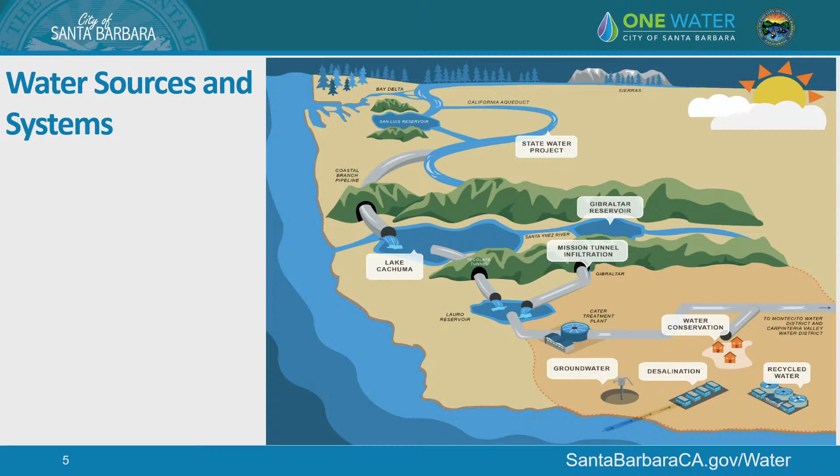This is a zoomed-out snapshot of our sources and systems that provide water to our region and community. It tells a story too: we have a very complex system, and our sources drive a lot of that complexity. Our treatment system is a T5 system, and our distribution system is a D5, the highest rating in terms of complexity. We also have a recycled water system, our desalination facility, the El Estero water treatment facility, and our groundwater production systems. Something we'll talk more about is the current state of our assets—our system is aged, especially our distribution system. It's complex and typically considered high pressure, so we'll get more into that.

Starting off with water treatment: they're responsible for treating our surface supplies for the entire South Coast region, more or less, and support water supply management, constantly working with COMB and the JPA members to support their capital improvement projects as well as supplies to their facilities. It's an ongoing balance of trying to keep everything going for our region. We also supply water to La Cumbre Mutual, and we work with Goleta Water District as needed to provide water to them during capital improvement projects.

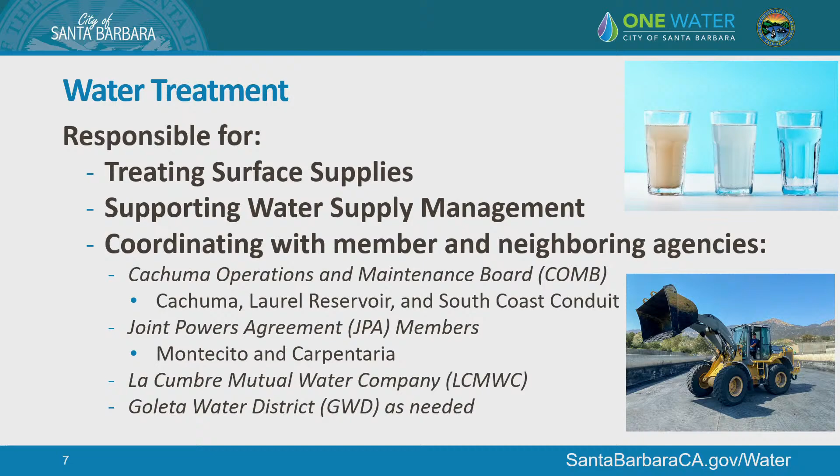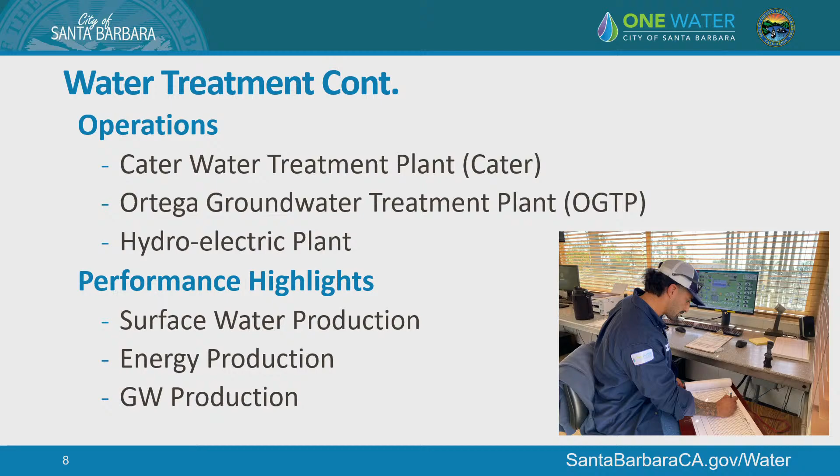Our city operations group oversees the Cater Water Treatment Plant as well as the Ortega Groundwater Treatment Plant and our hydroelectric plant. Some performance highlights we'll talk about are our surface water production, energy production, and groundwater production.

Our surface water production for this year was below 15,000 acre feet. You can see in this graph here on the right that conservation continues to be a strong theme for our community. We have a pretty consistent supply trend for our JPA members as well as our consumption for our city residents.

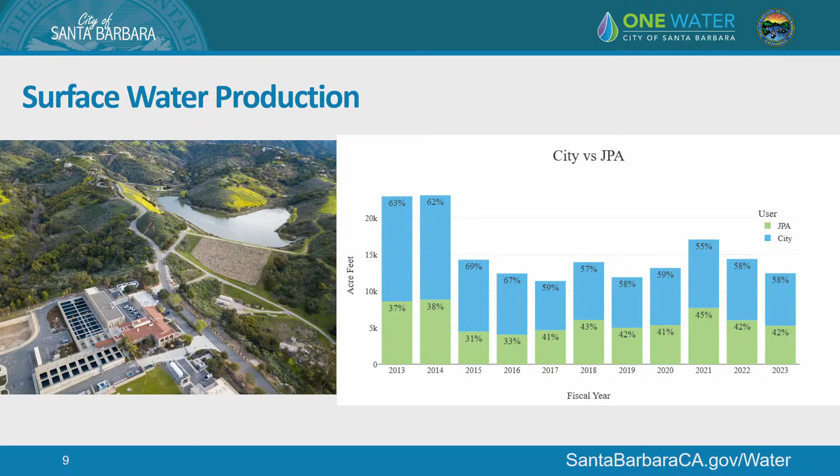Energy production is a big part of offsetting Cater's energy demands. On the lower left, that's the Pelton wheel that receives Gibraltar water and turns it into power. This graph shows a year with some usual trends, with the exception that we received water in Cachuma that we used going into February and March, which changed up our usual strategy to maximize the benefit of that supply.

As you can see in October, November, December, the water quality at Gibraltar did decline to the point where we were not producing energy from this facility.

A key point here is that we are doing an energy master plan, and we're going to be looking at maximizing the benefit of the hydro facility at Cater. I'll get into a special project that will present an opportunity for us to consider in the future.

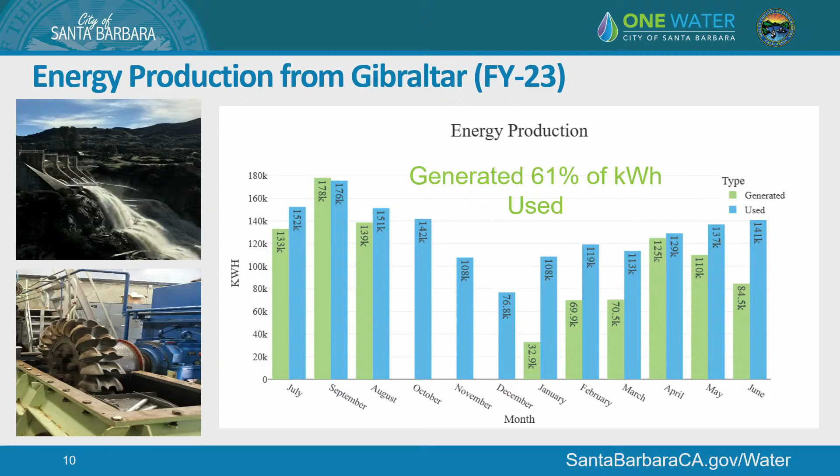In February, we shut down Ortega Groundwater Treatment Plant in order to rest the basin and take advantage of that opportunity to do some maintenance, which you see on the right. One of our vertical turbine pumps is being taken offline so we could do some much needed maintenance.

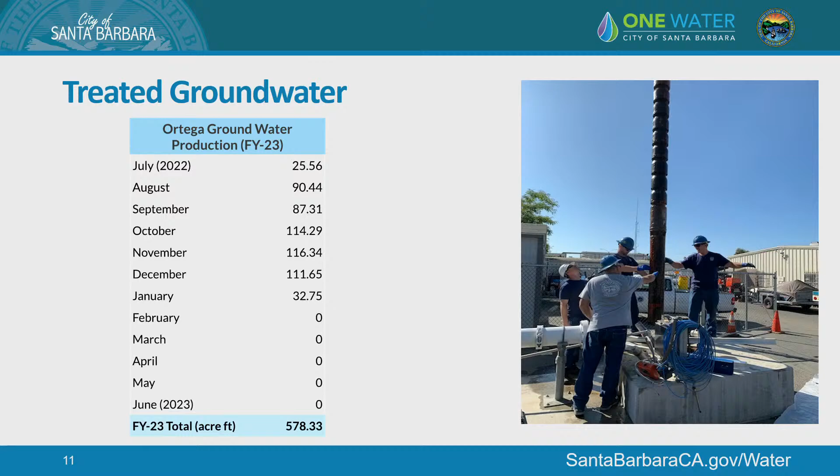As mentioned with our energy master plan, we're working on special projects to maximize the benefit of Cater. On the right is the Tesla battery system we installed this year, actually completed this year. It was a multi-year project that took a lot of hard work from our operations staff.

We were able to take advantage of the fact that we were going to have to shut down power to the plant, so Edison went ahead and replaced the transformers that serve Cater.

This battery pack allows us to offset peak demand, so between that 4 p.m. to 9 p.m. window, we're able to transfer power to the grid, and it's going to lower our electric costs about $870,000 over the course of 10 years.

It also provides an additional backup supply of energy to the plant. It can power the plant for about 4 hours. We do continue to have a diesel backup generator, which is really important for making sure this asset can always operate.

That said, the project was funded through the state PUC. We will be looking at opportunities to increase capacity at the plant, maximize the footprint we have there, and we're happy to have this project delivered.

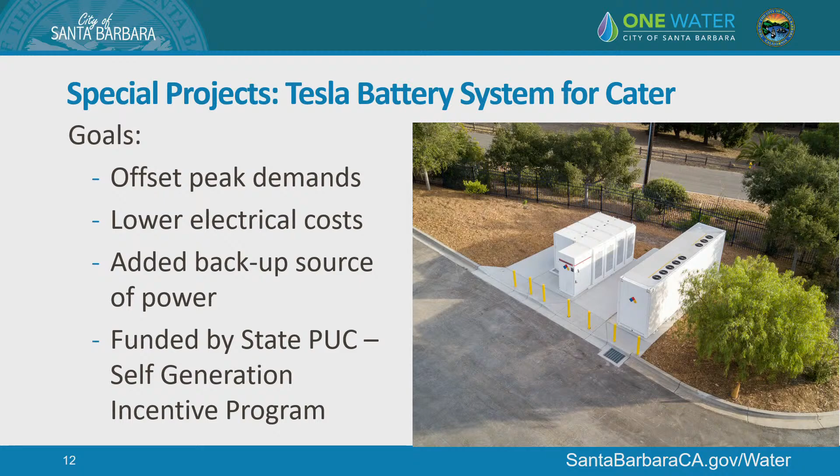Moving on to water distribution.

Water distribution is one of the largest groups in Public Works. They oversee a wide range of assets: over 300 miles of pipes, 27,000 service connections, 13 reservoirs, 14 pump stations, and 17 pressure zones. The 17 pressure zones is a unique challenge because we have a lot of terrain and varied elevations, which creates a lot of pressure management challenges.

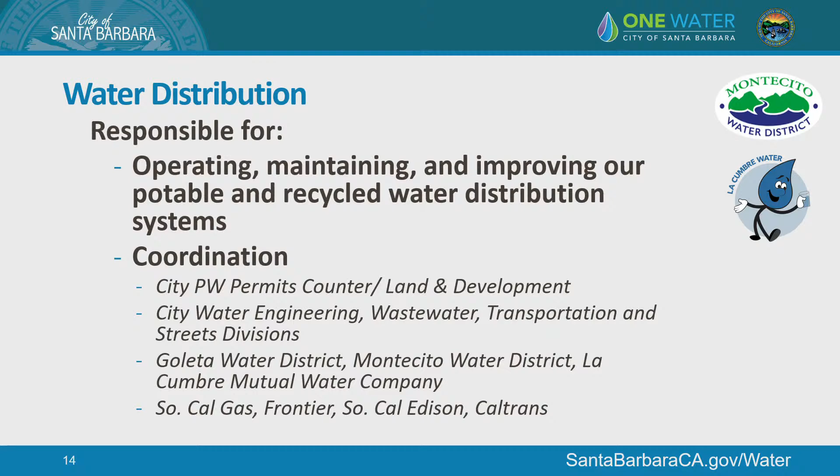They're responsible for operating and maintaining the system, and they also oversee our recycled water distribution system. They coordinate with a variety of utilities and other sections, divisions, and departments within the city.

Some of what we're going to go over is just their programs. We've broken up their programs into 3 general asset groups: pipelines, pump stations, and reservoirs, and then we have a group that oversees asset management, planning, and coordination. We're going to touch on some performance highlights.

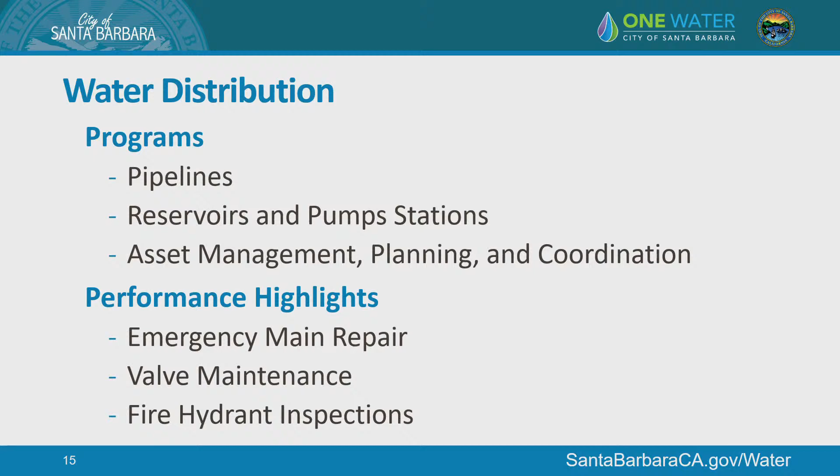The pipeline program is maintenance intense and capital intense. We'll be touching more on that, including emergency main break response, supporting capital, and our flushing program, which is currently not in full deployment since we're having to scale that back a bit due to current staffing. We're also touching on valve maintenance and showing you where we're at with that program, meters, fire hydrant maintenance, and installing new service connections, which is seeing a record level of permits as the city looks to add more density to our downtown region.

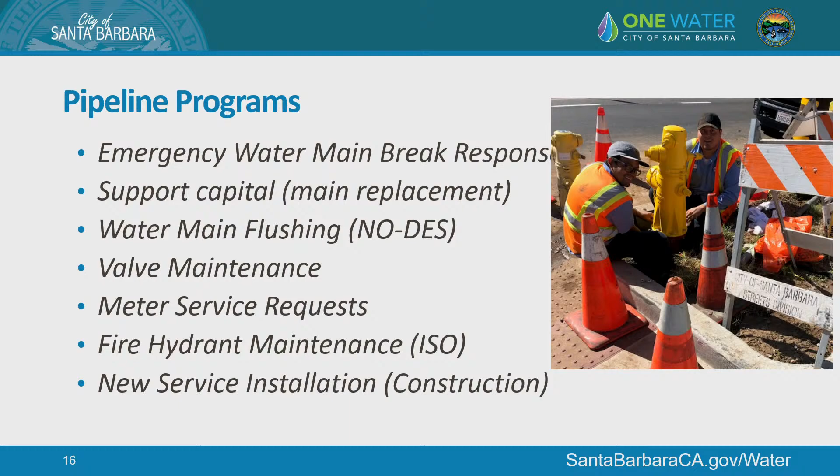A lot of the system was designed to maximize storage, and over time we've learned that water quality degrades. So we've done a thorough study of our reservoirs and how we need to go about replacing them, and we're going to get more into that.

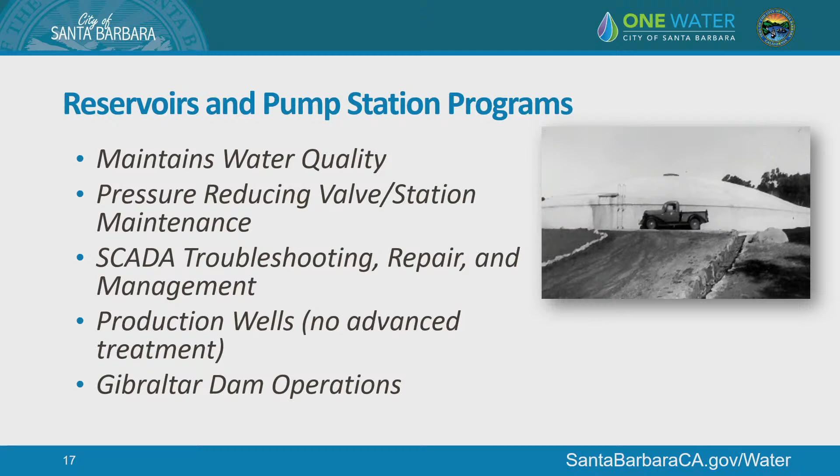And then, like I mentioned, pressure reducing stations, that's a part of our pressure management program. And then, of course, SCADA to keep eyes on how our system's performing at all times. This particular section also assists with special projects up at Gibraltar Dam.

Asset management program, you've heard a lot about asset management within Water Resources. It's been a big goal. It really started with El Estero and some initiatives there, and has since moved to distribution and treatment as well.

What we have on the right here is an example of some of the asset management work that we're doing. You can see the instrument in the gentleman's hand that's used to collect high precision GPS, which is a program that we piloted. In fact, others have come to us to study how we've used it. East Bay MUD came and visited us, an agency of that size and scope. I was a little shocked, but they were really impressed with what we put together.

We're looking at how we can maximize the benefit of this data throughout our capital improvement process. As you can imagine, having that precise location information in your GIS gives you a lot of power, so people are not having to search plus or minus 3 feet in order to locate the assets. It's something we've been working on for a few years and is really starting to come to fruition.

A few other things to mention is just the utility coordination aspect. There's just so much capital going on in the city, as I'm sure you've noticed driving through the city streets. We're seeing a record number of utility permits, the other utilities, SoCalGas, Edison. They're all needing to go through the same process as us of replacing their assets.

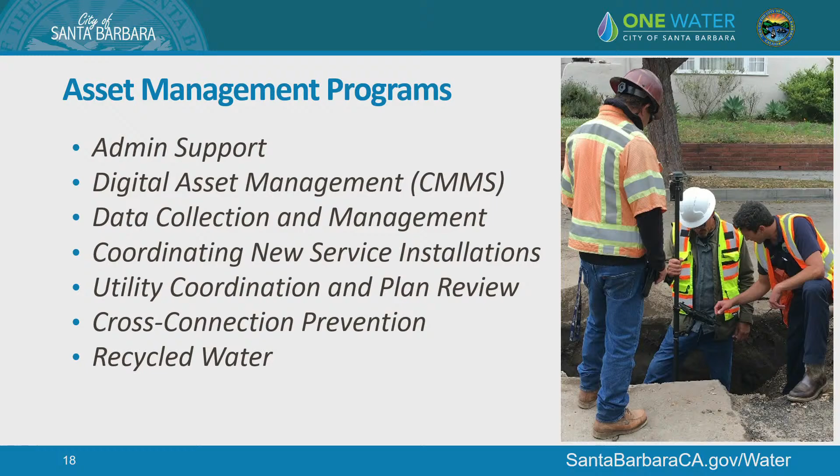Some performance highlights: emergency repairs, emergency response in general is something water distribution is a big part of for the city. We not only respond to our emergencies, but we respond to calls from PD and fire, as well as parks. Really anything that comes in after hours that's not public safety comes to us, and we provide a staff member after hours to support the needs of our community.

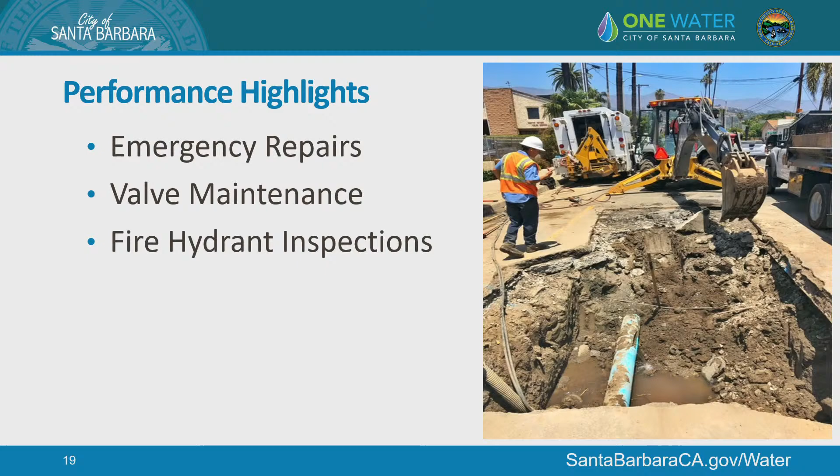You can see on the right here, we've got a crew working on a water main break. That's something we'll talk more about. Again, valve maintenance, hydrant inspections.

This is something we're proud of. It's really a significant challenge to be able to restore water within 12 hours. That might seem a little shocking because, yeah, we are staffed and we are really good at our job. But there are a lot of other utilities out there, and we rely on them to mark their utilities after we do have a break. Those lead times can make this a bit of a challenge. But as you can see, almost 95% of the time, we're meeting this goal, and it's an important goal for the community.

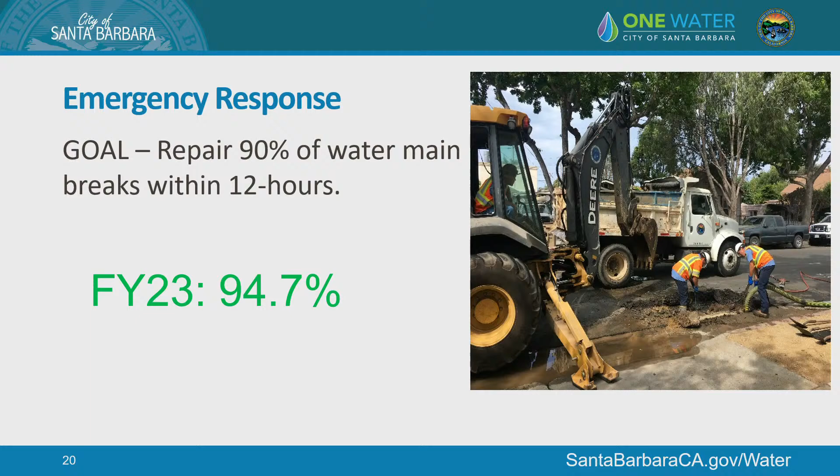Doug, you start? Yeah, it was interesting, Matt and I took some time to meet one-on-one with all the staff and just talk about how work was going, what were their frustrations, and one of the things that did come up was this needing—I'm using this opportunity just to inform—when we have to dig in the road, you have to call USA, Underground Service Alert. All utilities are notified, and they have a certain time to respond and come out and mark their utilities.

And in those times, we can't do anything. That can be very frustrating for our customers. They're sitting there watching city staff sitting there. And I just tell you, from the city staff perspective, we hate sitting there and not being able to do anything. But for the safety of our people and our community, we just can't go into the ground until all the utilities have been marked.

And so it is a frustration, and I think as we are starting now to get more high precision data, potentially sharing it, but there are obviously security reasons for not sharing some of this information. It is one of the challenges we have, because our folks will mobilize, get there, get prepped, get our parts, and then we just sit and wait for the gas company or electric company to show up. I just want to put that out there because it is a frustration of our staff, just having to explain to the public why they can't do anything.

With that, I will add that we stay very busy. I do have a clip here of a water main break that was significant. It's really what we're trying to avoid with our asset management work. I don't have the audio on it, so I'm just going to share a little bit of information about the incident. This incident occurred just at McKinley School, over near the community college, the elementary school there, and as you can see by the amount of debris, it was a significant water main break. It required a robust response from the entire Public Works Department, but especially with water distribution taking lead.

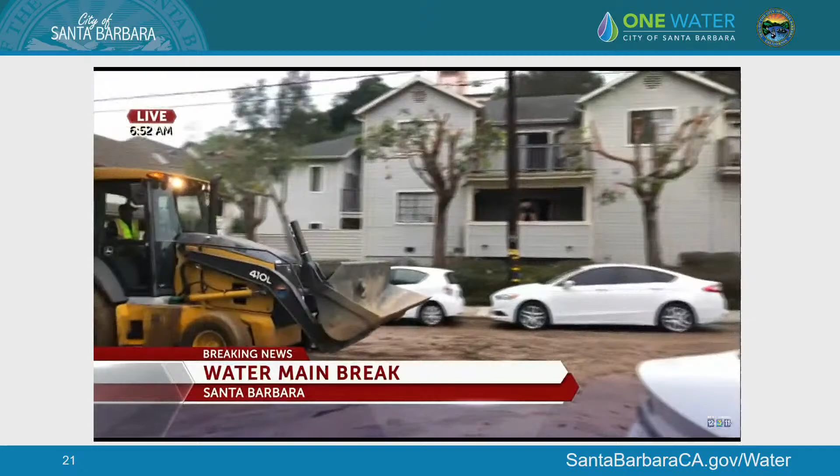In this case, it was unfortunate. We were really not aware of the risk that we had with that particular pipe. It was a 12-inch diameter cast iron pipe from the mid-50s, and it destroyed a significant section of the playground. We did work swiftly, and we had the full playground restored within a week. That was huge, and we had to coordinate a lot with the school on that.

But then, as you could see by the amount of mud that was down below, there was a lot of cleanup. We had to work with Woodside HOA, and I want to give credit to Marissa Kahn and our risk management group. She does an exceptional job of managing claims for the city. The unfortunate total on the cost was about $1 million worth of cleanup and repair. So significant costs—it's what we're really trying to avoid with our asset management program.

I'll talk a little bit more about that. What you see here is our costs that we've gathered from our CMMS, our computerized maintenance management system. These costs are really a reflection of how well we manage our emergency response, but they don't include a lot of other things. On average, we experience about $100,000 in claims annually.

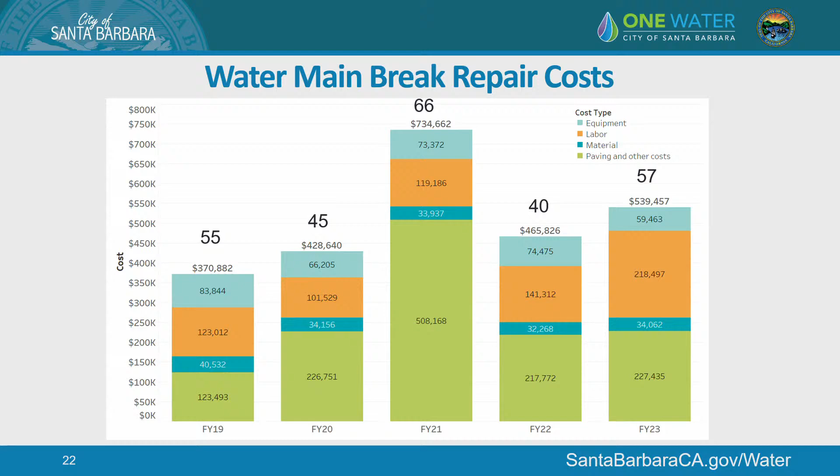There's also the cost that's not captured: the reactive response, pulling people off one thing to do another. And then there's the cost to the community, which can be substantial, probably equal, as some studies have indicated, from having to reroute traffic, close businesses, close schools, things like that. So it's a substantial cost, and it really is just lost time, resources, and money.

So moving on to our water main replacement goal, this is the why. Why are we replacing water mains at the rate we are? It's a significant investment that we're pouring into our capital program. It's the biggest asset group that we have, and this work in main replacement is really critical. I think the next slide shows this quite a bit.

Again, we're trying to replace 2% of our water mains annually. In fact, we're not trying, we're doing it. It's a huge goal. If we're talking to many other utilities out there, they are in the 1%, 1.2% range, which is where we used to be. But you'll see in this next slide the why, again, why we're doing this.

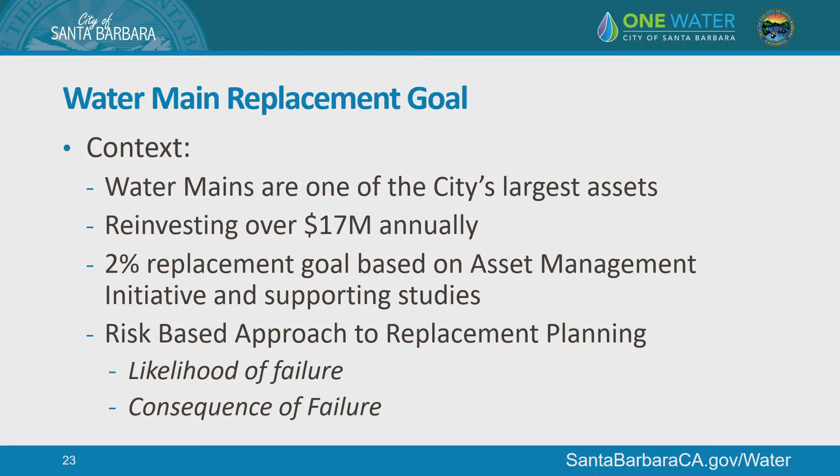We do use a risk-based approach to replacement planning—likelihood of failure and consequence of failure is what we're trying to gauge. We are working with Colorado State University; we've been partnered with them for some time, and we've developed a replacement model that takes into account all the characteristics of our pipelines, so that at a desktop level we can analyze where our challenges are and how we can put together different pipes into a single project, because a lot goes into optimizing our replacement planning.

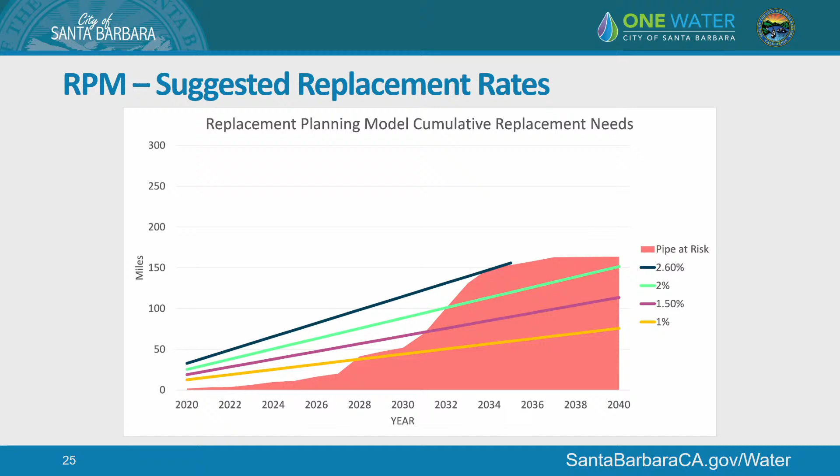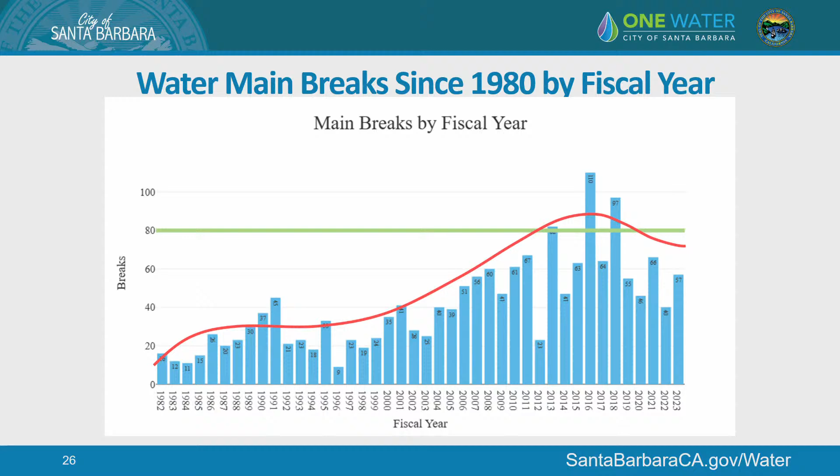I'll touch real briefly on this one. Commissioner Snyder, thank you, I had a quick question about this.

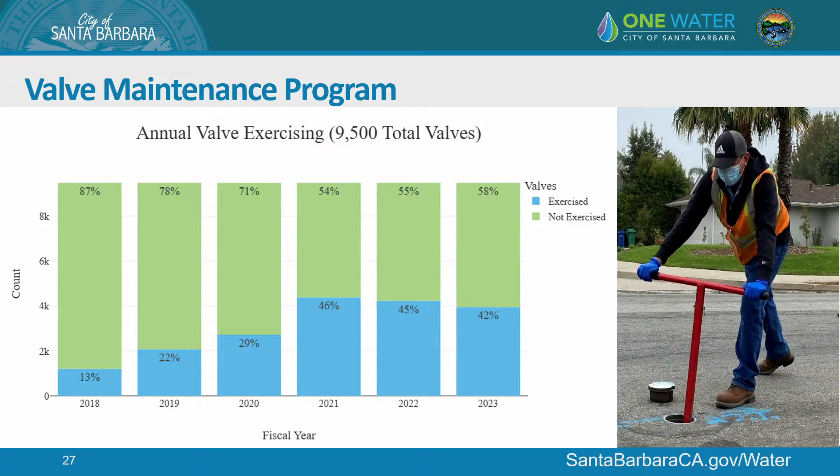Just generally thinking about the water main replacement and valve exercising, are there opportunities around new technologies that would help automate some of this or advance the system, or is it pretty standard, just needs replacing, and the technology isn't advancing that much? Great question, thanks for bringing that up, because the person on the right is showing you how it's done. We also have a valve hydraulic piece of equipment that takes the labor out of it. This is the fastest way to do it, but probably 80% of the time we're using that valve actuator. It does gather information, but there's nothing feasible you could automate in the process, unfortunately. We're always looking at innovation. We're a member of an innovation working group, ISLE, and we're always scanning for opportunities to use technology to reduce the labor we put into the work, but unfortunately it's just not feasible. Thank you.

Maintaining our fire hydrants is obviously a significant and important goal, and we do maintain our fire hydrants. We inspect them on a 3-year basis and exercise the valves associated with them, ensuring that the control valve is working. This feeds into the Insurance Services Office rating we receive, so it impacts insurance rates. We work closely with the fire department to make sure we're achieving strong ISO scores, keeping insurance costs low for our community, and we tend to score very well.

Moving on to Gibraltar Dam. You can see a picture of our operations and maintenance crew, or at least one of them. We only have two FTEs assigned to Gibraltar Dam, and that is Mr. Frank Deely, our dam caretaker.

He's up top on La Cumbre Peak for one of the snow events that I'm sure you all recall. Frank lives in the backcountry and at the dam, and it's a unique challenge to live that remote. He does the job excellent, exceeds monitoring requirements, and takes a lot of pride in it. His assistant, Mr. Castillo, also gives him a lot of help.

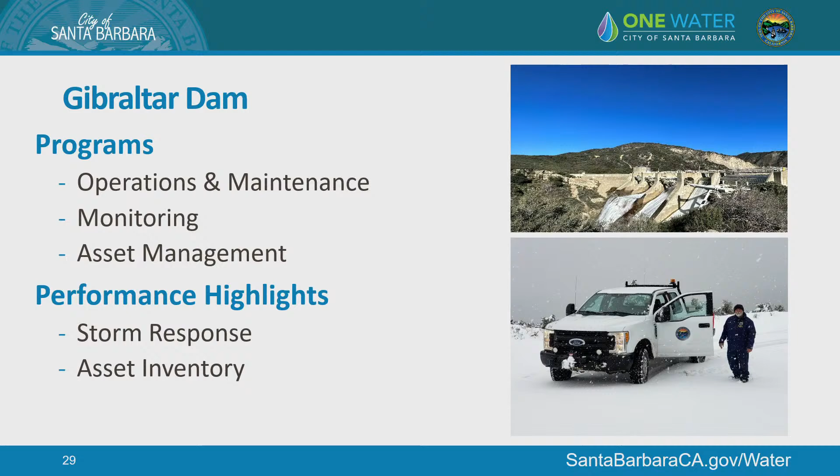The asset management that we've been doing in distribution and treatment, we're also going to be doing for Gibraltar. We'll talk a little bit more about that. Some performance highlights we have is the storm response. The January 9th storm was significant, and we'll touch more on that. Then we're going to do a deeper dive into the asset inventory later in the capital part of our presentation. And above, that's a Bluebird Day at Gibraltar. It's just beautiful. An asset we've had for over 100 years, and we're fortunate to have it.

This is a snapshot of actually January 10th. So January 9th, as we've reported through our wastewater group and others, presented a lot of challenges. I recall on that specific day, as the storm was coming in and the latest flood models were hitting, they were predicting about 9 inches, and we saw nearly double that in the backcountry. Being minimally staffed and just the way the storm hit made for an all-hands-on-deck situation, figuring out where our damage is and what it looks like.

This is the lower road to Gibraltar. This is U.S. National Forest, and they maintain the road. As you can see on the left there, all those landslides, that's a lot of what we're having to deal with. On the upper road as well, we've got several miles of backcountry road that we have to maintain, and there were slides everywhere. From January 10th on, we were doing damage assessment and just trying to access the dam.

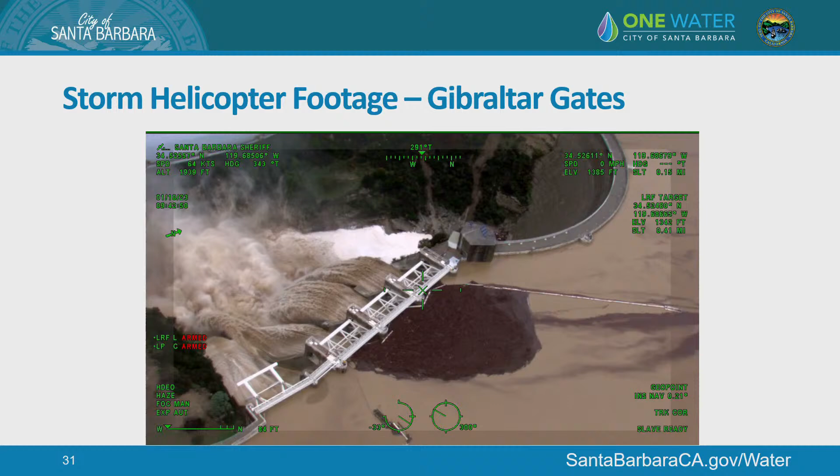We had mobilized dozers as well as loaders and other equipment just to be able to access the dam, which took a few days. We actually had to helicopter some of our staff in, our engineering team, as well as some contractors, to do some damage assessment, since we had log booms stuck in our floodgates. It was something we didn't immediately pick up on that night, but then the next morning we found out that the log booms had been compromised and pulled through the floodgates.

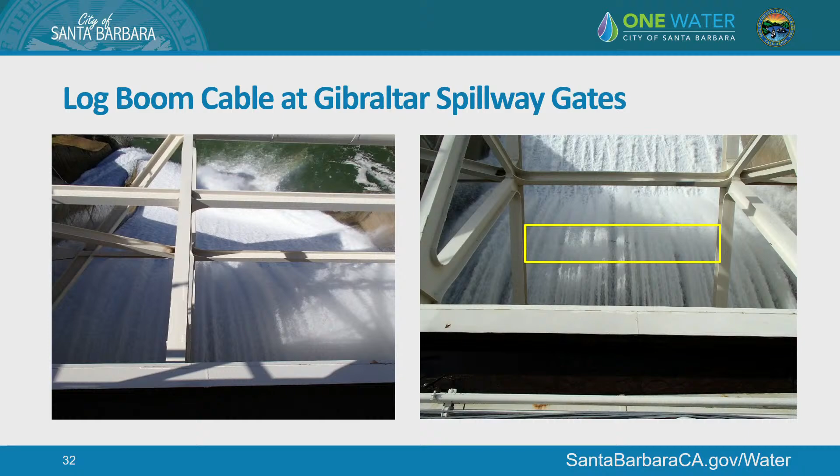What you can see on the left is kind of like normal flow. In the little box on the right, the yellow box, you'll notice there's just the tiniest indicator of some cables being pulled through there, which of course was quite alarming. The next day on January 11th, we mobilized our staff out there to come up with a method. We were fortunate, we have a great engineering team, and they were able to free the cables.

It was something that, in a nightmare scenario, we're going to drain the lake to that low level and lose our supply there. But they were quickly able to mobilize and come up with a method to actually cut the cable on both sides and then pull it from both downstream and upstream of the spill gates, and made quick work of it. So we were never in a situation where we actually had a significant threat.

I'm going to let Ms. Shu, Principal Engineer, go ahead and take over and give us an update on some of the capital improvement that's driving our work.

Good morning. I'm Ashley Shu, Principal Engineer, and I oversee our Water Resources Engineering team. We're responsible for supporting the entire Water Resources Division in delivering design and construction of capital projects, as well as supporting operations when needed, mobilizing during emergency situations.

I'm going to provide an overview and look a little bit more at some of the storm damage we experienced from January 9th. It's timely since we're right in the middle of our first major storm event for this rain year. I did want to reiterate what Mr. Ward has mentioned, that we're in a period of our strongest capital program for the water program. We currently have about 24 active capital projects totaling a value of over $200 million.

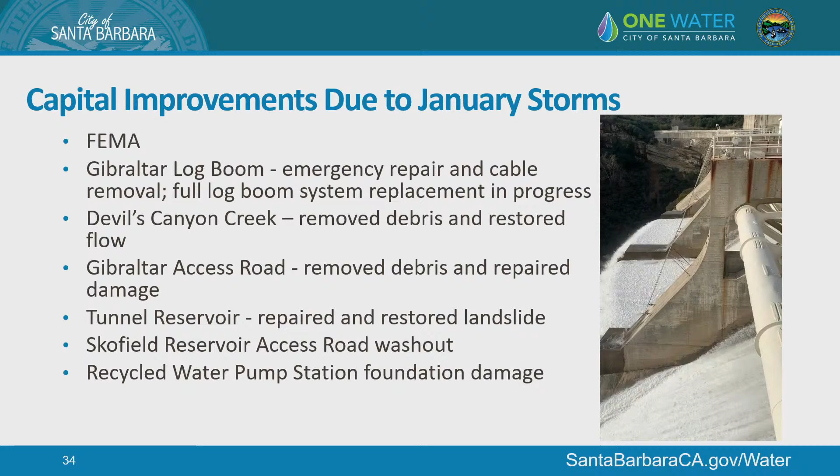Most of these repairs are already complete, most of them completed within the first month or so. We do have a few that are ongoing, but the other item that continues to be ongoing is our coordination with FEMA, and that is a significant effort - providing all of the required backup documentation in an effort to get reimbursement. That will continue for quite some time, even as we enter the next winter and potentially see additional damages.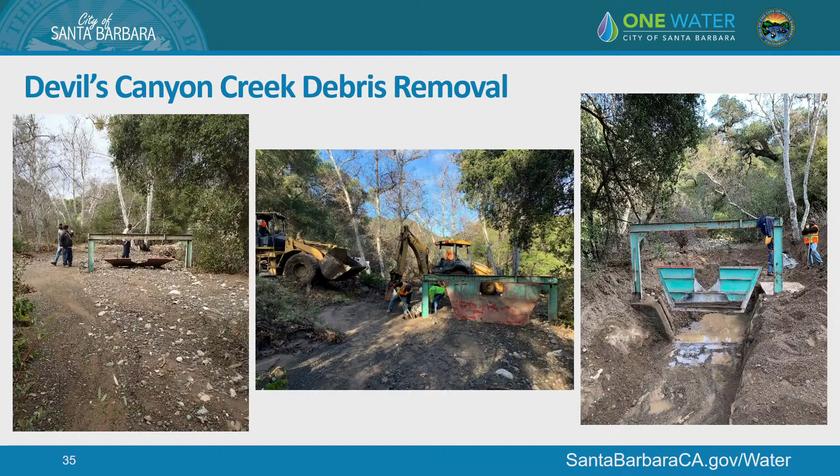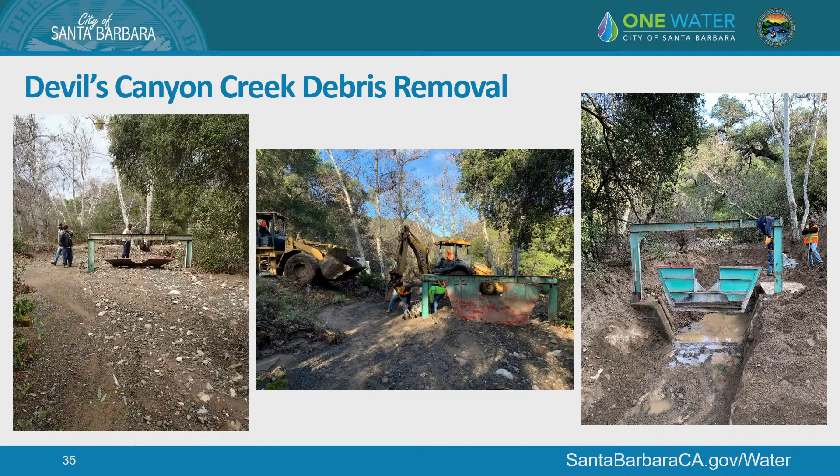Devil's Canyon Creek is located up adjacent to the Gibraltar Reservoir and provides an important diversion of high-quality water, especially when the Gibraltar Reservoir water quality starts to degrade. Due to the storm on January 9th, it was completely silted in, as you can see in the photo on the left. We mobilized a contractor to immediately start clearing that debris, reestablish the channel flow, and get those diversions started back up. That was a big success story, and that work was done by the end of January.

We've talked already about the Gibraltar log boom damage that occurred during the January 9th storm, with that large amount of debris pulling the log boom system through the spillway gates. We mobilized another contractor to perform an emergency repair immediately, and they replaced about 200 feet of the log boom that had been carried through the spillway gates. They did a great job cobbling it together with parts from our city yard and from their own yard.

They really did a great job getting the system at least functioning enough for the next series of storms coming through to help protect the dam. Meanwhile, we are doing a replacement of the entire log boom system that's currently in construction - not today due to the rain, but that should be in place shortly. We had hoped to have it in place before the first rains, but as we did further investigation, we realized that the anchor points actually needed to be physically repaired and replaced. When it's done, it's going to be a nice, robust system to protect the dam for years to come.

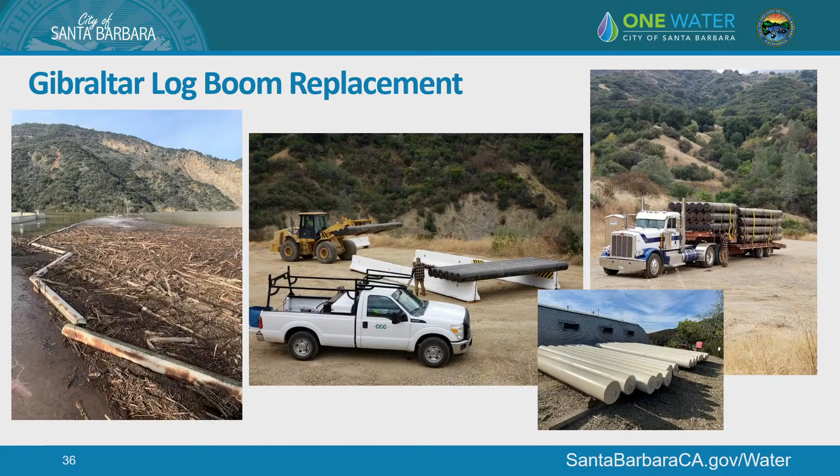We talked about damage to the lower access road, but there was also significant damage to the upper road. This is off of the paved Gibraltar Road, about 6.6 miles of unpaved road, and we estimated that about 30% of the road was damaged from debris, vegetation, and rock slides. It was critical to reestablish access for the caretaker who was stuck out at Gibraltar, and to get staff in to bring resources, perform inspections, and get repair work completed. We did emergency work to clear the road and reestablish access, then followed that up with a more comprehensive repair in March, replacing some of the storm drain facilities that had been damaged.

Concurrently, we now have a multi-year contract in place with a contractor to perform preventative maintenance before the rainy season and then respond to emergencies as needed. So we're in a good place there.

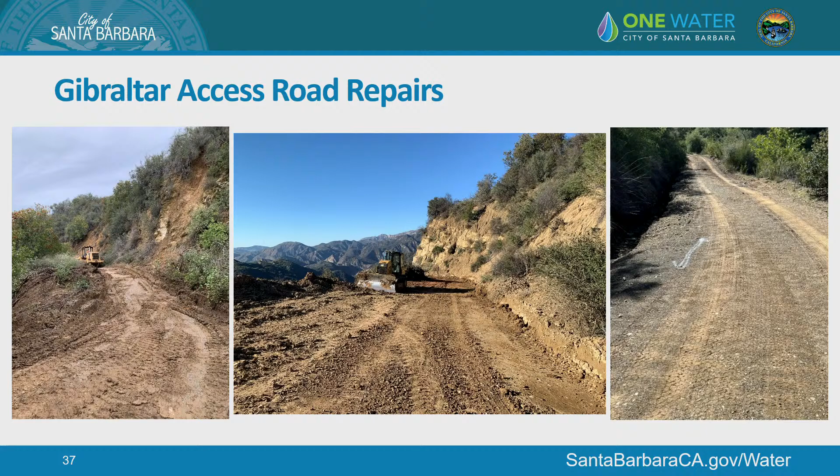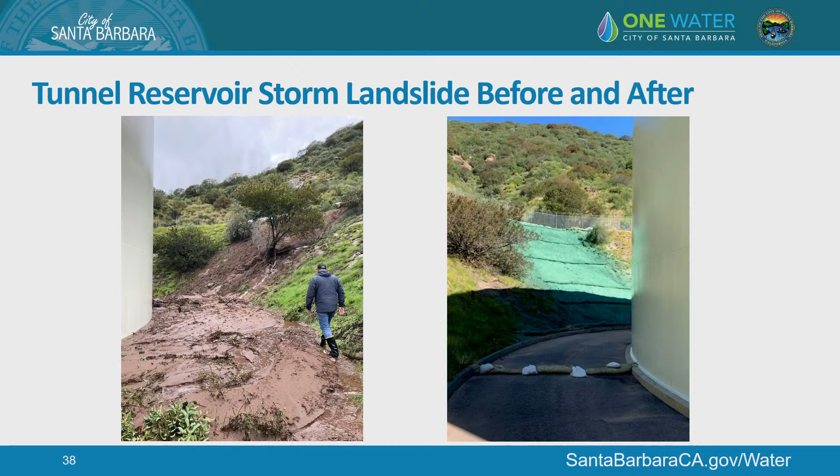We also had a landslide, a hillside failure at the tunnel reservoir. You can see the access road around the tank was completely inundated with debris. We did emergency debris removal, and then some slope stabilization followed up later in the spring.

We also had a road slip out, or failure, at the access road to Skofield Reservoir. We've done an emergency repair to stabilize this enough, but the long-term repair is actually being combined with a streets project where they're doing a very similar repair to other locations on the paved Gibraltar Road. So we're looking for some economies of scale there and performing the work efficiently.

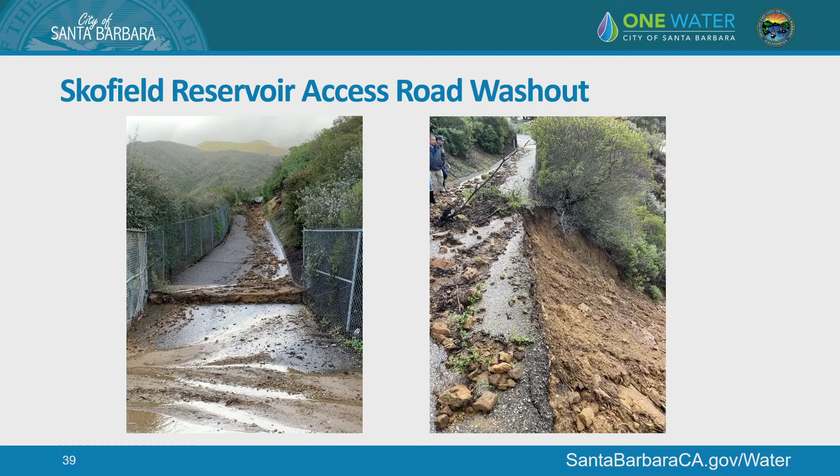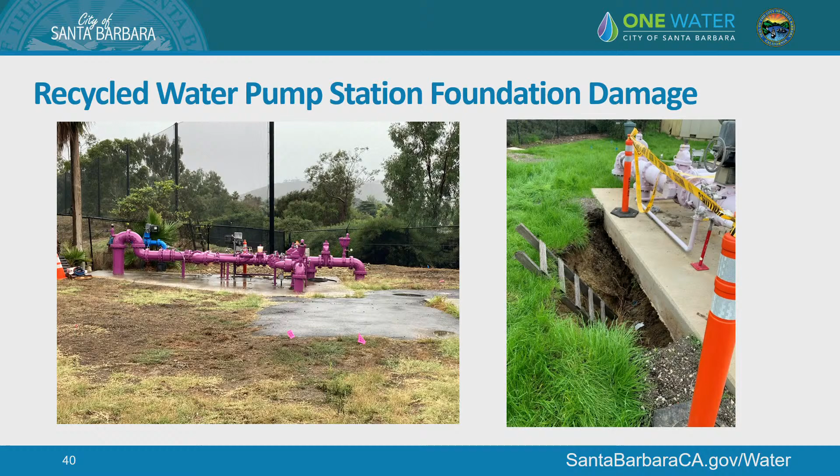We've talked a lot about Gibraltar so far, but it is a very important asset to the city. As Mr. Ward mentioned, we are currently working on an asset inventory of all of the assets located out there. That's something that has long been needed, and going through the storm response and spending a lot of time out at Gibraltar brought this to the forefront. So we're in the process of completing that inventory, determining the value of the assets, and then developing a proactive maintenance and repair program.

We're also looking at upgrading the caretaker facility house. There's building repairs that are needed. We're looking at a long-term potable water supply. It's kind of ironic that it's located at the lake, but the lake isn't a reliable potable water source for the caretaker. So we're looking at potentially drilling a well to supply the caretaker, and then also looking at some power options, looking at solar options to provide more reliable power there.

We are also in the process of a design study to address the Division of Dam Safety concerns about the vintage concrete on the spillway that was original to the construction of the dam, which was built in 1922. That study is underway, and we do plan to do some field investigations in the spring when the flow has slowed down enough to be able to do that.

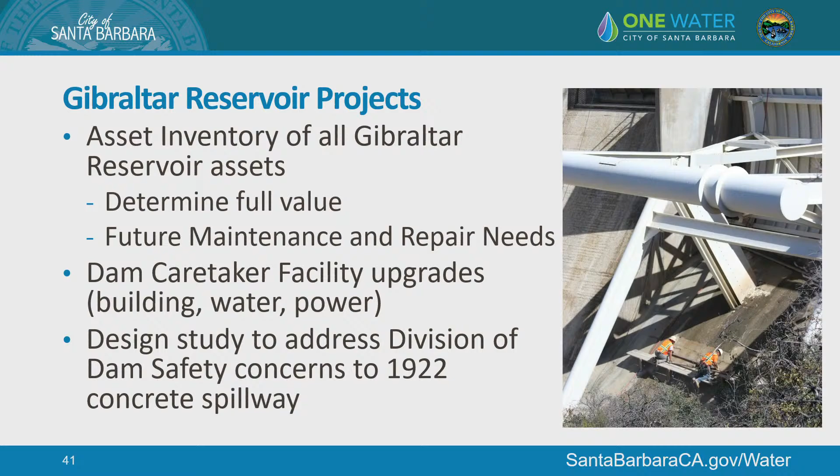Switching gears a little bit now, hitting on one of the largest capital programs within the water capital program, and talking about water main replacement. Mr. Ward mentioned we have a really lofty goal of replacing 2% of our system each year. That equates to about 6 miles of water main replacement. And we've had a lot of challenges over the last few years in meeting that.

Starting with the pandemic, work had to be put on hold, and that led into supply chain issues and delays getting materials, really significant delays. And then, of course, inflation, high construction costs, and contractors having labor shortages. So all of that has contributed to being challenging, but we continue to push really hard and be diligent in meeting that goal for all the reasons that Mr. Ward described, and trying to slow the curve of breaks.

We currently have a project out to bid. It's called our FY23 Water Main Replacement Project, and it is about 7 miles of replacement. So that's a bit over our goal, trying to make up for some lost time during the COVID years.

With the increased investment in water main replacement, there's also been a corresponding increase in investment on the streets maintenance side, with the passage of Measure C a few years ago, which has made it even more important for all of the assets within Public Works to be closely coordinated, making sure there aren't overlapping projects. The worst case for all of us is that a street is paved and a few months later we're coming in with a water main replacement. So we've been putting a lot of effort into utilizing GIS and mapping tools to help identify those conflicts, and then working together to sequence work appropriately. We're also piloting a couple of ideas here.

You can see both De La Vina and Cliff Drive highlighted. On Upper De La Vina, the streets group received a grant to do a large corridor improvement project there, and it was also slated for water main replacement. So we are actually combining the two into one bid, including the water main replacement work in the streets contract. That will go out in the spring with the goal that it'll look like one seamless project to the public, not having two separate contractors trying to coordinate timing. We're hoping to see some economies of scale there with cost.

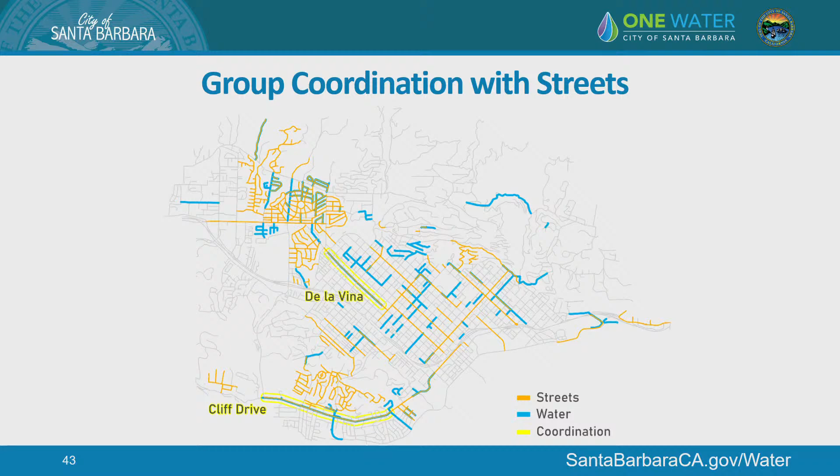Mr. Ward: Just a quick question on the desal pipeline. How do we do with toxics in the ground?

That's a great question. We did have a significant amount of contaminated soil removal and the costs associated with disposing of that properly. Yeah, I assume that was going to be the case, knowing the history of that area and the problems individual properties have had. Yes, we did anticipate that, but it was even more than expected.

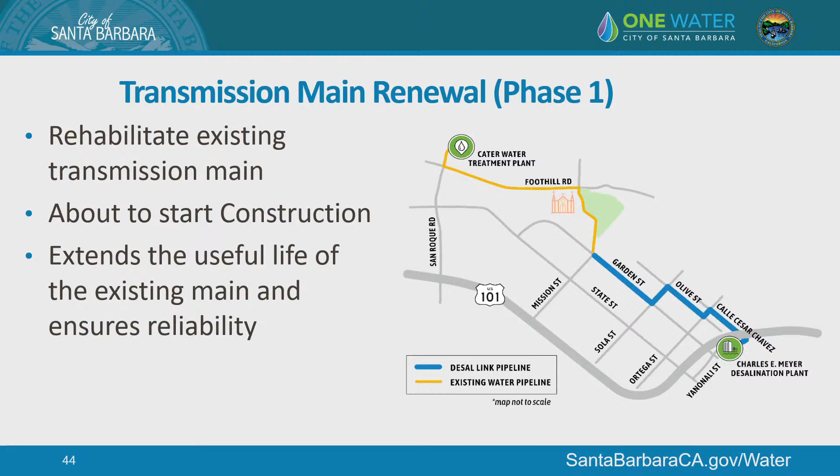And with the overall goal of improving the resiliency of the treatment plant and the facility, we're also looking at and planning to install ground-mounted solar panels and additional battery systems to provide additional offset to Cater's power needs. Another piece included in this project is the final part of the connection between desal and Cater, which is some additional piping to connect the finished water reservoir to the transmission system. And that will be the final project in connecting.

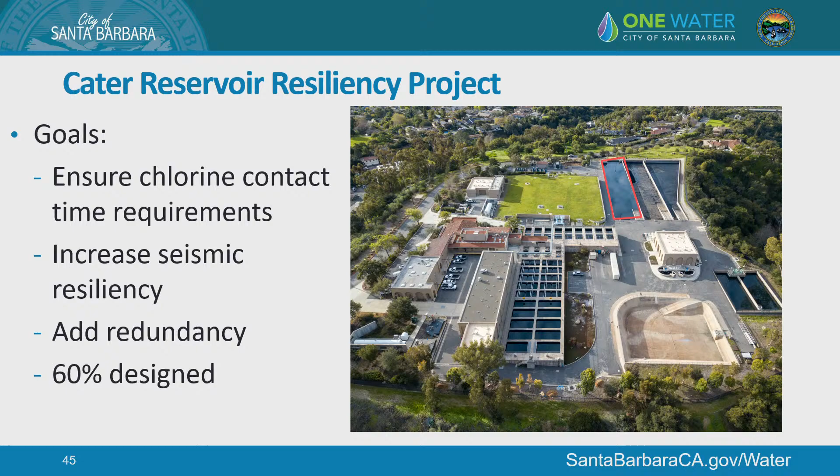The other importance of this project is that it needs to be complete before we move on to the Vic Trace Reservoir Replacement Project. You've started hearing about this project recently. It is underway and in the planning process. It's a critical storage facility for the entire system with a current storage capacity of 10 million gallons. The project will replace this reservoir in its entirety, going from a partially buried reservoir to two buried reservoirs on the site.

We have the design RFP posted. I believe proposals are actually due today. We've already selected a public outreach firm to assist us with developing a strategy for delivering this, what's going to be a very challenging project in the middle of a neighborhood over a long duration. We also have an environmental firm already under contract doing preliminary environmental investigation work, and that was used to help inform the scope of the RFP for design.

We are expecting to have a design firm selected in early 2024. That contract recommendation will come to Water Commission in the spring and then go on to council. We will be reaching out to try and offer opportunities for those who would like a tour before we bring this item back, so that you have a sense of the space we'll be talking about.

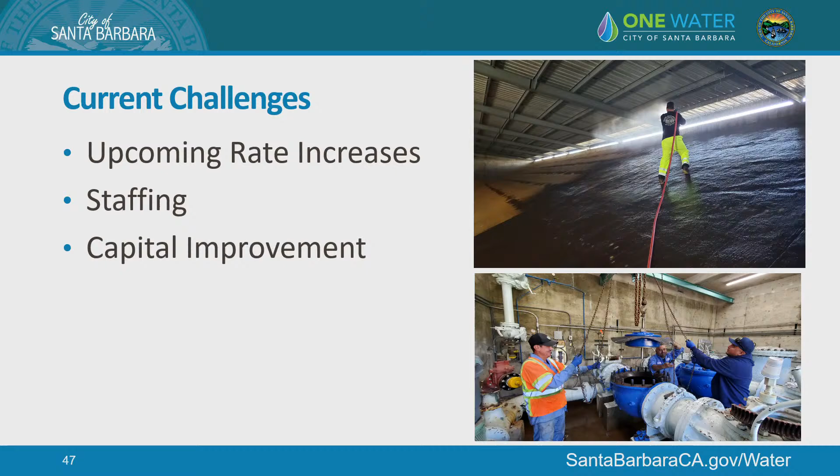One thing I feel like I failed to talk to you enough about is the pictures. In the upper right, that's one of our operators at Vic Trace cleaning the walls of the reservoir. We were performing an inspection. That project's been in the queue for 20 years. It's definitely one that's necessary, and I'll talk just a touch more on that. You can see some operators below working on the valving at that location. As you can tell, there's some big pipes. It's a really critical facility for the city, a big consolidation effort to create a hub for our storage at Vic Trace.

Rates - preliminary estimates are coming in double digits, and we're still refining that and working on it. The drivers are the aged infrastructure and the fact that we're facing non-deferrable capital. We've really pushed out the useful life of mainly the distribution facilities at this point, and we're doing everything we can to smooth the curves, but the fact is we need to replace these key assets.

So this is very timely, both the wastewater and the water capital. We will be planning on a robust conversation in January on rates, and we're going to try and get as much information out to you ahead of time, not only on the affordability studies - we hope to get that to you early so you'll be able to look at that. But we really want to have a good conversation. This kind of sets the base.

I hope when we used this presentation today, you didn't see any fluff in there. We do not have any fluff, but we're really trying to think through what options we have, because the rate revenue increases we're looking at are pretty significant. At this point we're proposing to do a 3-hour meeting, so we have some real time to get into it and throw up some spreadsheets, talk about what some of those implications are. Much more to come on this, but hopefully this gets you started on where we need to go.

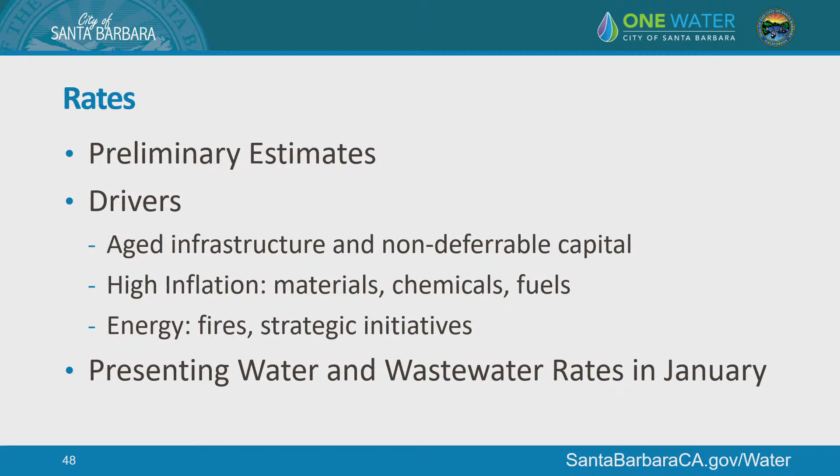I think you've probably heard in other presentations some of the drivers that are well known at this point - high inflation, energy costs that we've experienced from the fires, and strategic initiatives to really go green. We'll talk more about a lot of that in January.

Staffing - recruitment and retention has been a significant challenge for both water and wastewater, specifically in our distribution operations as well as our collections. It's something we've put a lot of work into, developing our staff and then retaining them, but we are struggling. Currently in our distribution group, we have 18 operators and 6 vacancies. We're working constantly to try and retain operators. This is a problem that's been happening over a long period of time, and it's going to continue for another long period of time because there's just a deficit in the industry.

The labor constraints aren't just with water operators, it's also our construction workers. It's been discussed a lot lately, but really in the operators, it's a niche market. They perform essential services. We have tried contracting out operations type of work in the past a few times, and there's just really no one there and no one competent. So everyone that's willing and able is in the industry, and they're actively getting recruited at a lot of larger agencies that are experiencing the same strains that we are. Specific to us, we developed an experience gap.

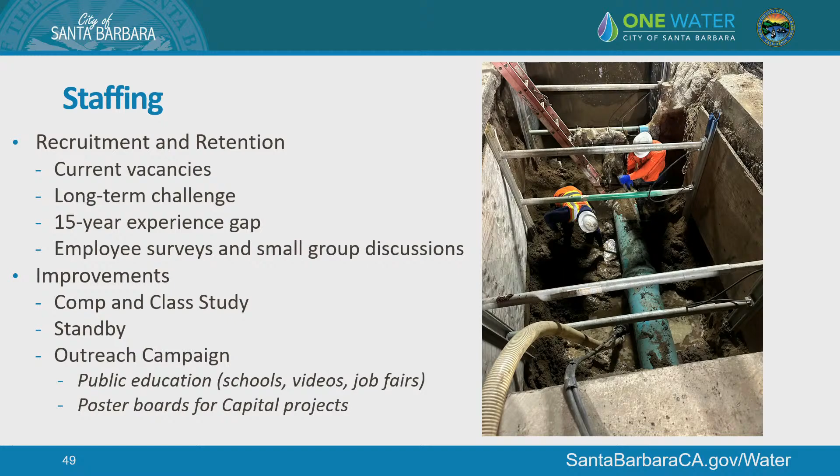10 years ago we could get 100 applicants for a very general recruitment, and operator-in-training was written pretty open. Now it's dozens, and some don't even show up. But I think we can do a better job in our outreach and being more visible - that can certainly help, and I think it will garnish some results. With the comp and class study, I think we'll be more competitive.

Madam Chair, just a quick question. I got lost on the compensation classification study timing-wise, and usually that wouldn't come to the Water Commission, I don't think. But I'd like to be briefed on what those findings are, just to know what issues we're dealing with, because the recruitment as well as the experience gap - these are critically essential services workers to this community, and people don't totally understand the problem we're facing in that regard.

Yes, I mean, we've been eager to.

It's been a while since we've heard from the consultant, Siegel. They're working on the class and comp study, and we did a big survey this summer, provided them with a lot of information, but haven't seen much from them yet. I do hope there's more of an interactive process, because we're eagerly looking to sit down with them and talk about our challenges - what are other agencies doing, what can we do, how do we become the employer of choice? That's where we need to be. I think we offer a very exciting place to work with a lot of good challenges to work on.

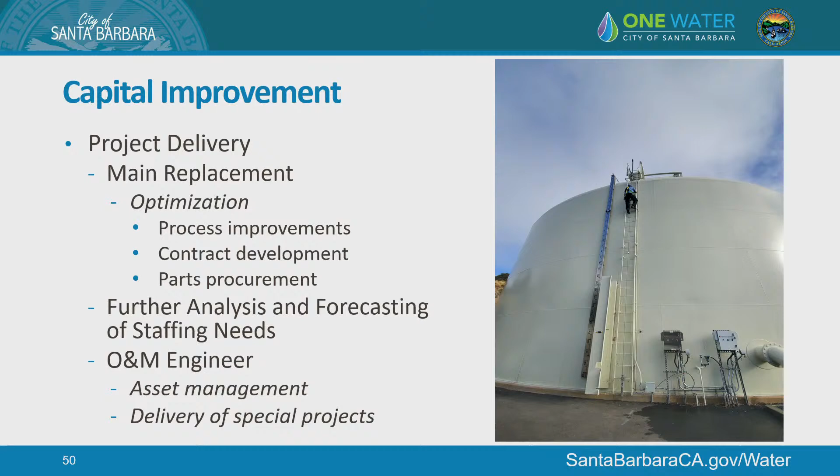And with that, any final questions?

Apologies if this is a little crazy or a perfect-world kind of question, but is there ever any circumstance where, coming from the assumption that most of the retention issues can be traced back to cost of living or housing shortage issues in Santa Barbara, and increasing costs whether you're renting or whatever—you don't have control over your housing costs—would the city ever consider housing for employees as a capital project that would help with retention? I know that's a crazy question, but in the long term, unless there's a huge economy crash or something, that doesn't seem like it's going to impact Santa Barbara housing prices. In the long term, like in 50 years, will anyone be able to afford to work for water or whatever? And people who live here still need that. So what if, I don't know anything about how funding works, but what if the city owns a school that doesn't exist anymore, or land that wasn't being used for something else, and builds low-cost housing, and that gets rolled into the cost—which still seems like it might be less than fixing a dam.

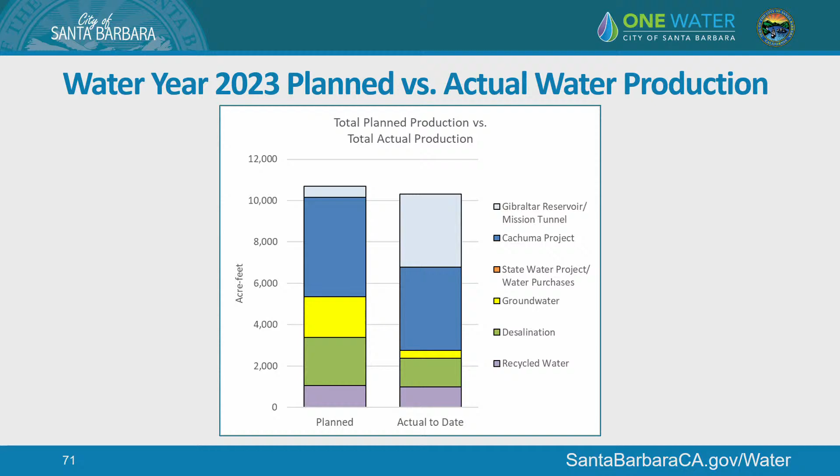That, again, is because it was a very wet year. It will be interesting to see going forward what our customer demand trends continue to be—whether they continue to track below projections, or perhaps rebound back up to where our projections are. That's a wait and see that we're going to be monitoring.

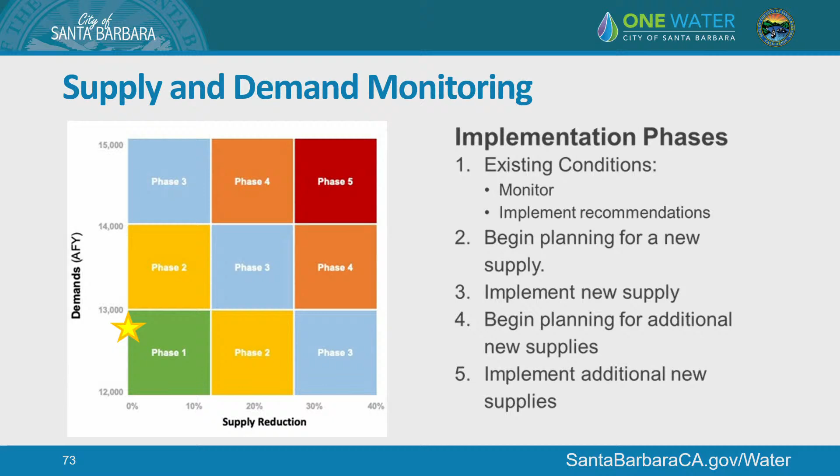Moving into our overall water supply outlook for the next few years. Our planning horizon is generally 3 years, so 3 rainy seasons essentially. We do take a very conservative approach in our planning. We assume we're going to have dry conditions.

And I do say that as it's raining outside and my left foot is completely wet from stepping in the torrent of rain to get over here. So we do assume very dry conditions. Even assuming those dry conditions, assuming the next 3 rainy seasons don't deliver, we are still looking good. We have enough supplies to meet demands for the next 3 water years.

If dry conditions continue, we will be entering that 4th rainy season, water year 2027, with limited stored Cachuma and State Water Project supplies. We are planning to not use any groundwater in the next 3 years to really continue to rest those basins, and to use some State Water Project water instead for water year 25 and 26.

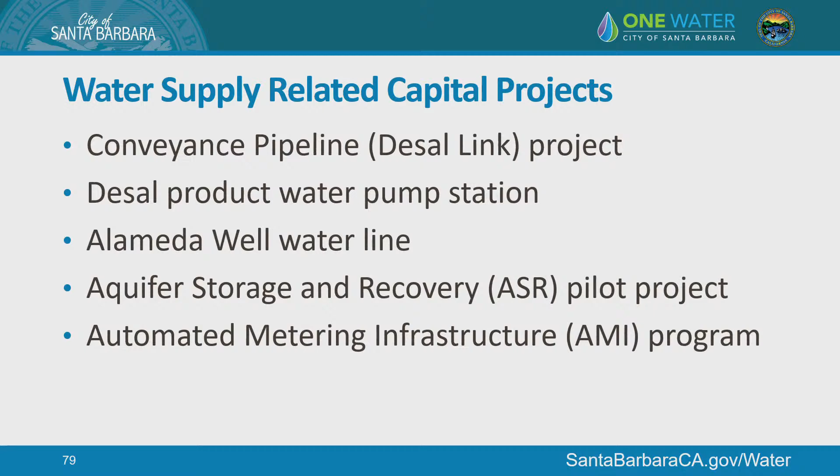As Ms. Corey mentioned earlier, we have to make some groundwater findings as a part of our state water contract. We have to make the finding that our groundwater basins are in long-term balance. So I'm going to delve a little bit more into our specific groundwater resources now.

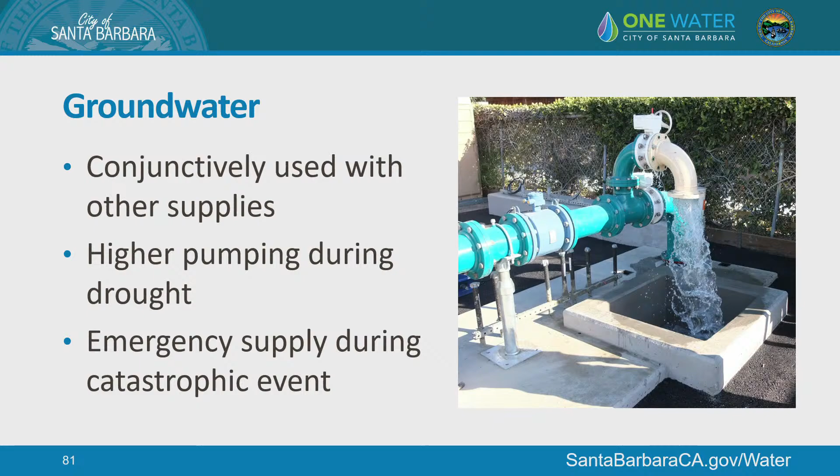As you know, we conjunctively use our groundwater supplies in coordination with our other water supplies. We tend to rely on groundwater pumping during times of drought. We did pump our basins pretty heavily in the last drought, and we are resting them now. It is also a hyper-local supply, which is really important if there were to be some kind of catastrophic emergency that would cut us off from our more distant supplies, making us unable to reach our surface water reservoirs or the State Water Project, for example.

So just to orient you a bit to our groundwater basins: the green basin up towards the north is the Foothill Groundwater Basin, and it's the smaller of the two basins. Then we have the Santa Barbara Basin, which is the blue, and that is divided into two storage units. Storage Unit 1, which is where we do most of our pumping out of, and then Storage Unit 3. Storage Unit 3 has difficult water quality, so we only pump out of it to help supplement our recycled water system. The black triangles you'll see throughout here are our city production wells.

Okay, so delving more into the Foothill Basin. Can I ask a quick question before you move to the next slide? You've got a couple of light blue Goleta Basin markings within Unit 3, and then off to the very far right to the east, touching into the Montecito Basin? Is that just a coloring? I think that's just a coloring issue.

So the light blue areas within the Santa Barbara Basin are just because there are holes within the city boundary. Like that light blue area right under the A in storage, that area is technically not within city limits, so it's not colored gray, making it look light blue. But we can maybe look into fixing that coloring. That is all the Santa Barbara Basin. The Goleta Basin is just that light blue area to the west of the green area where the Foothill Basin is. So geologically it is the Santa Barbara Basin. Correct, it's just politically it is not - the underlying area is not the city of Santa Barbara. But it is part of our groundwater basin, and it is part of our service area. We do service that area.

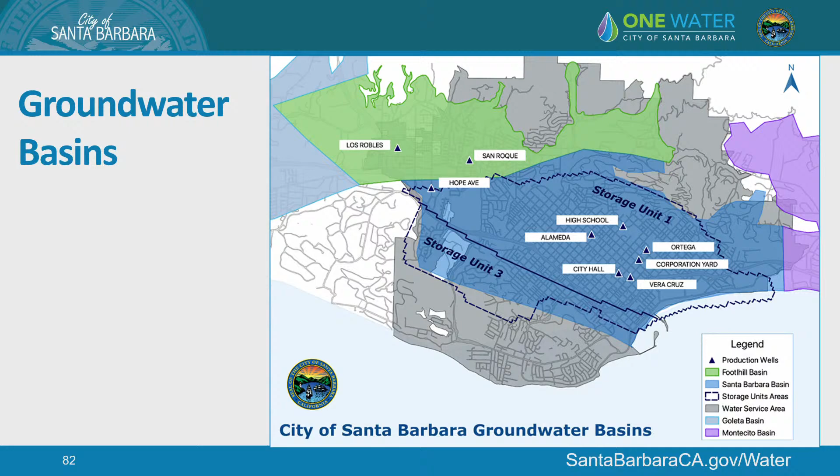Okay, so we'll dive back into the Foothill Basin then, and that's the green area on the map. There are several pumpers in that basin. The La Cumbre Mutual Water Company is one of them. There is also a mix of various private pumpers in the basin, but they are probably not the predominant pumpers in the basin. The predominant pumpers would be the city and La Cumbre.

So we do have to do this very high level groundwater balance to make sure that we're in compliance with our state water contract requirements. This is very high level and it's very conservative, and we don't assume any recharge in these calculations. So it is very high level.

So we estimate, based on our 2018 USGS study, that there's a little over 8,000 acre feet available for pumping in the Foothill Basin, and due to pumping, we estimate there's around 3,800 acre feet left. Again, that's assuming no recharge. To give you some sense of scale, the city's total pumping capacity between both the Santa Barbara Basin and the Foothill Basin is about 3,500 acre feet a year, so we don't even have the physical capacity to pump that much out in a given year.

As I mentioned earlier, we're not planning on doing any pumping from our groundwater basins for the next 3 years. We're planning on resting the basins. We are doing an aquifer storage and recovery pilot project, essentially an injection pilot project where we are injecting water down back into our groundwater basins. That is in process now. We did inject 11 acre feet into the groundwater basin in Foothill in water year 23. Overall, the water levels are recovering in the Foothill Basin. At this point, they have recovered to levels similar to what we were seeing in the early 1990s.

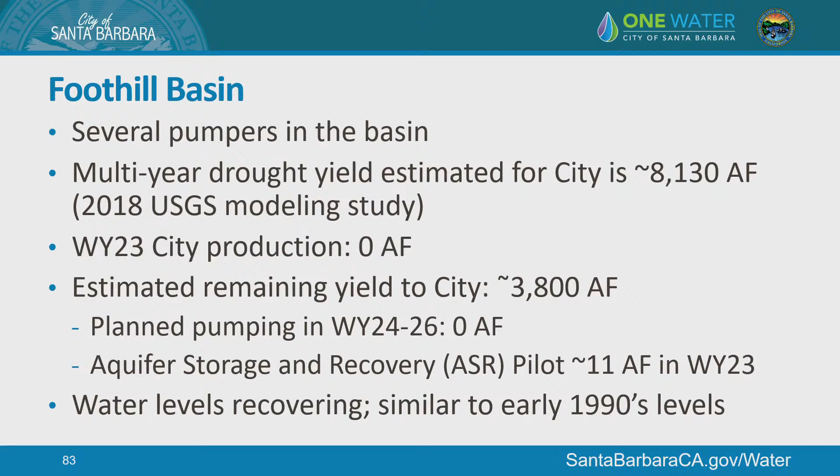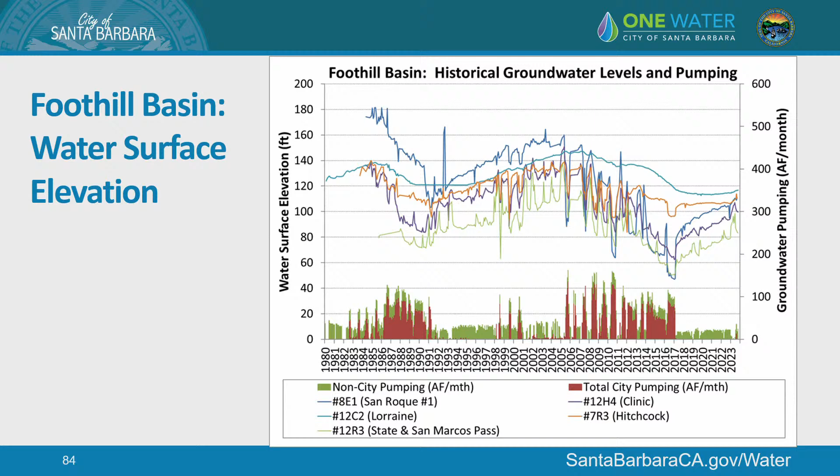So here's just more graphical representation. The many colorful lines moving horizontally more towards the top of the chart show our groundwater elevations based on what we're seeing at our monitoring wells. Along the bottom you'll see pumping. Green is pumping from entities that are not the city, and red is the city's pumping. You can see we pumped the basin quite a bit during the most recent drought, and that did cause groundwater levels to drop. Then we turned off our pumping, and as you can see, those levels are again starting to recover. We're back to about early 1990s levels.

Okay, so moving on to storage unit 1. This is a larger storage unit. We see that there's probably around 16,000 acre feet of storage available in that basin. Due to pumping, we estimate we have around 9,600 acre feet left. Again, that's assuming there has been no recharge. We stopped pumping from that basin after the rains earlier this year, and again, we don't plan to do any pumping in water years 24 through 26.

This storage unit, again, it is closer to the ocean. So with this storage unit, we focus more on monitoring seawater intrusion, whereas in Foothill Basin, we're looking more at overall groundwater elevation. In this storage unit, we're really closely monitoring those chlorides in the basin.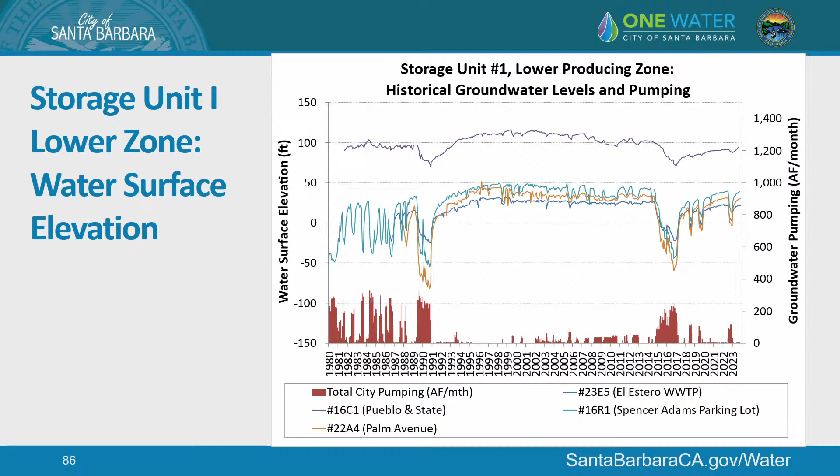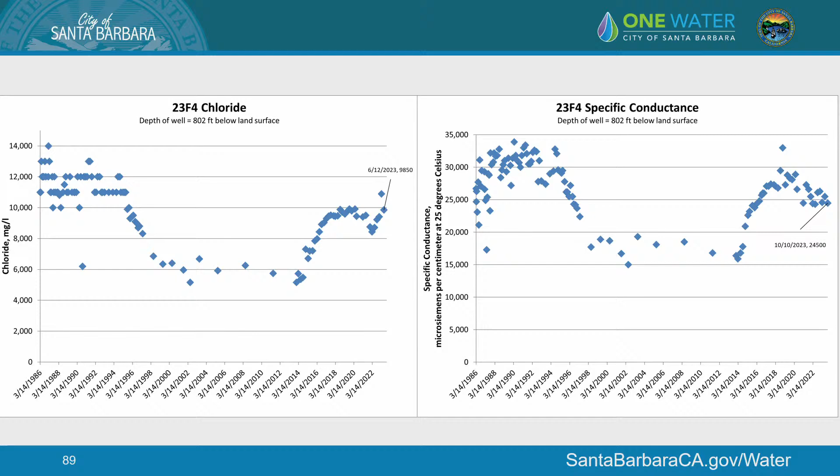Okay, so first we're going to focus on the monitoring well that's closest to the ocean. On the left we have chlorides, and on the right we have conductance. You can see in the last drought in the 80s and 90s, as we were pumping the basin pretty heavily, the chlorides did increase in the basin. Then as the drought subsided and we subsided with our pumping, the basin did start recovering. We see recovery at this monitoring well as being around 6,000 milligrams per liter. Then you can see as we entered the most recent drought and pumping increased, there was starting to be more influence of chlorides into the basin. Now that pumping has stopped, we're starting to see a bit of recovery, but we're still recovering when it comes to this location.

Okay, so we continue our journey inward. Now we're at the monitoring well that's closest to the El Estero Water Resource Center. We're about halfway between the ocean and the 101.

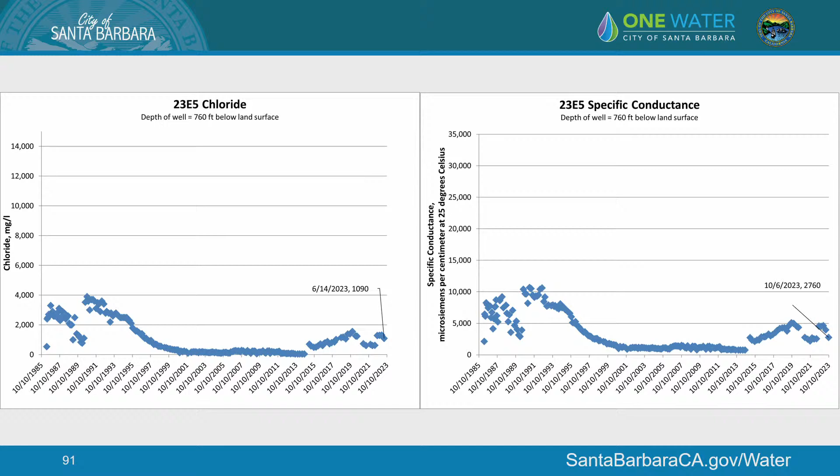The scales from this slide and the last slide are the same, so you can see the chlorides at this monitoring well are quite a bit lower, which is good, because at this point we're moving closer to our production wells. Again, in the last drought we saw a lot more chlorides with pumping. The basin recovered, chlorides jumped back up a little in the most recent drought, and again we're starting to see recovery.

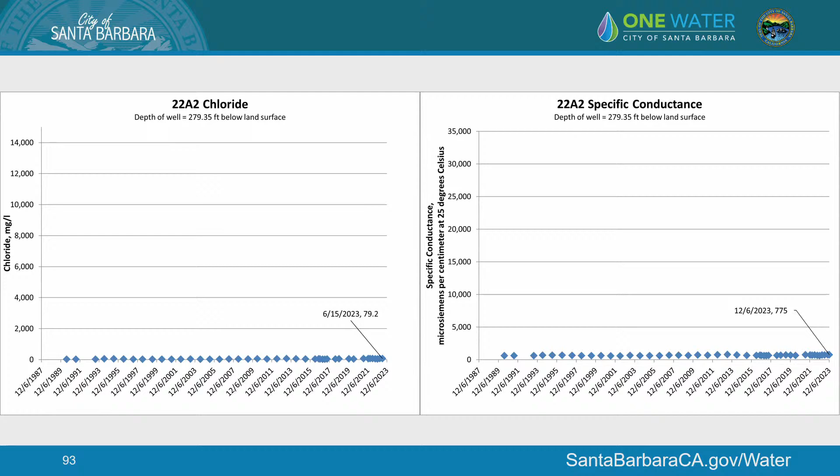And then we're jumping the freeway, moving even closer to our production wells. This is looking really good. This is the monitoring well closest to our actual production wells, and again it's staying really steady, very close to zero. So we're happy to see there's no evidence of seawater intrusion as we get closer to our production wells.

Storage unit 3, which I mentioned earlier, does have difficult water quality. We only use it to supplement our recycled water system, never for our potable water system. We did not use any water from that storage unit in water year 23, and we estimate a safe yield of about 200 acre-feet a year.

Okay, and with that, that brings us to our recommendation today, but I'm also happy to take any questions prior to that. The recommendation is that the Water Commission recommend Council approve and adopt the report for the 2023 water year and find that our groundwater resources are in long-term balance.

I just had a clarifying question on the chloride level. I heard you say that around 6,000 is about the threshold at that first monitoring well, but everything else is way below that. So is that the level at which, if we saw the other two monitoring wells start to get towards that, it would become a concern? I don't know if we'd want the other monitoring levels to get up to 6,000 - I think that's just for the one closest to the ocean.

I think for this monitoring well location, 6,000 would be considered recovery, but we wouldn't want to see that level at the other inland monitoring wells. So what level would be a concern to start paying attention to? I think as soon as we start seeing any hits on the other side of the highway, that would be an indication it's getting close. Got it, okay, thank you.

Please, sorry, sorry, thank you. Thank you. For storage unit 3, offsetting recycled water - can it be tapped directly to water De La Guerra Plaza, or is it a calculation of usage, like a paper offset?

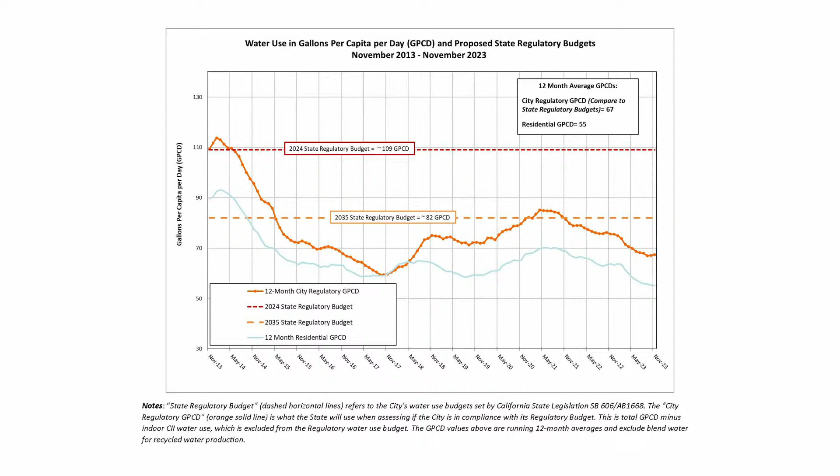We've been working hard, our community's doing what we need them to do, so I'm not terribly worried about that, but would appreciate it if you've had a chance to look at this—feel free to send us an email, or at the next meeting when we have these in here, let us know if you have any other suggestions, we are listening. We're really trying to freshen it up and make sure we're providing information helpful to you and the public when it comes to where we are with our water supplies.

And with that, I am happy to answer any questions. No more questions from the board? Do we have public comment? No, we do not. Okay, fantastic.